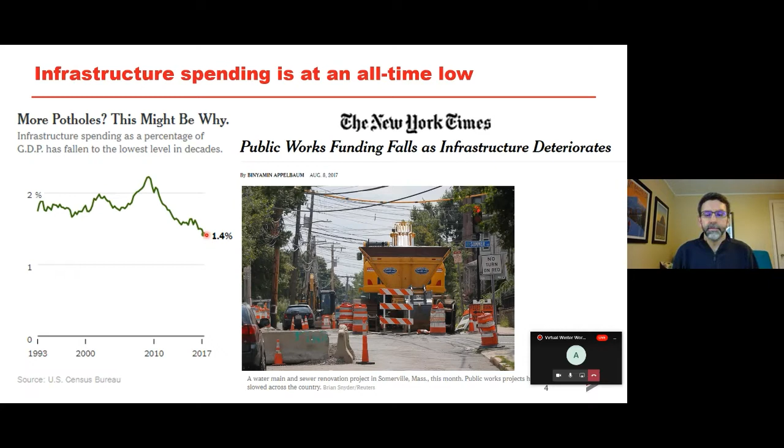In fact, when the American Society of Civil Engineers had to come up with one single grand challenge, they said we need to reduce life cycle costs by 50% by 2025. A couple of years ago that seemed like a long ways away, but now that we're in 2021, it seems like it's just around the corner.

Life cycle cost analysis is going to be a key element of addressing that funding gap, because we could either get more funding to close the gap, or we could be more efficient and decrease the amount of funding that we need.

A big part of our research is in asset management. When ASCE talks about solutions to raise the grade, they mention fixing the trust fund and increasing investment, but one point says we need to use asset management best practices to prioritize projects and improve the conditions, security, and safety of assets while minimizing costs over its entire lifespan—basically, using asset management practices to be more efficient.

So what I'm going to talk to you about today are some tools we can use for economically efficient management of pavement networks: the first is competitive paving prices, the second is life cycle cost analysis, and the third is asset management.

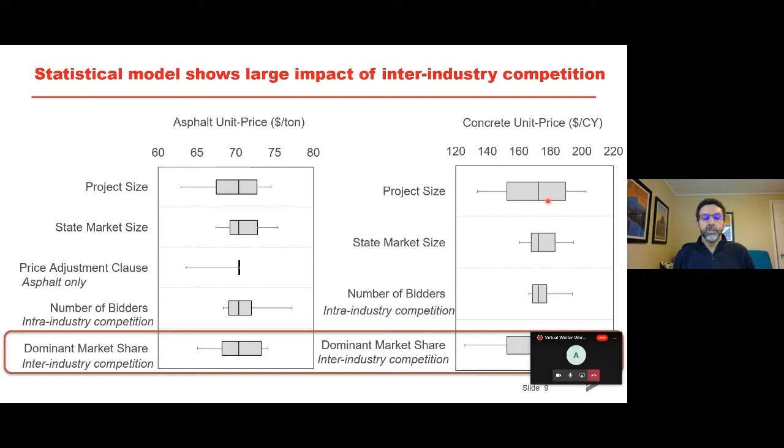Using that statistical model, we can then try to estimate if a state was spending, we just chose an average of 5% on concrete, and then if we increase this level of concrete market share to 10%, 15%, 20, or 25%, how much would that decrease paving material prices?

So if we increase market share from 5% on concrete to 10%, it would decrease asphalt prices by 3% or concrete by 13%. This isn't a specific prediction, it's just saying that statistically across all the data we looked at, when we see higher competition, these are the amounts of lower spending we see on asphalt and concrete.

Then what we can do is estimate if you were to implement that increased competition, how much more paving could you do for a fixed budget? Because if you lower prices for both asphalt and concrete, that means for that amount of money, you can actually do more paving.

So if you're at that 5%, then increase it to 10, 15, 20, 25%, for that 25% you can actually pave more, about a 6.5% increase in total paving tonnage.

I don't think it's rocket science that if you get more competition, you're able to lower prices. What was interesting for us is that the data we were able to evaluate really bore that out, that in this paving market, that is something that we see.

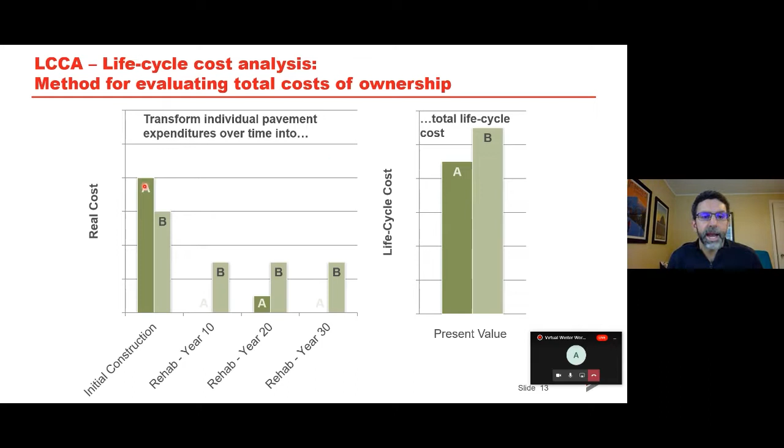But then we also need to look at what are costs associated with rehabilitation that happens in the future. So for example, this alternative A has a higher initial cost, but much lower costs that happen in the future. We can sum those up to get the total life cycle costs. In this case, A had higher initial costs, but lower life cycle costs.

We've developed some models that allow you to look at uncertainty in what happens in the future, and that's what I mean by probabilistic—it just means we incorporate uncertainty. As you can imagine, there are many sources of uncertainty. For the transportation agency, there's uncertainty in the unit price of inputs and also the quantity of inputs. And on the agency side, there's also uncertainty on how much you're going to be using in the future, when you're going to be doing different actions, and what future construction prices will be.

There's also what we call user costs. There are costs associated with traffic delays and fuel loss. So there's uncertainty associated with those things as well.

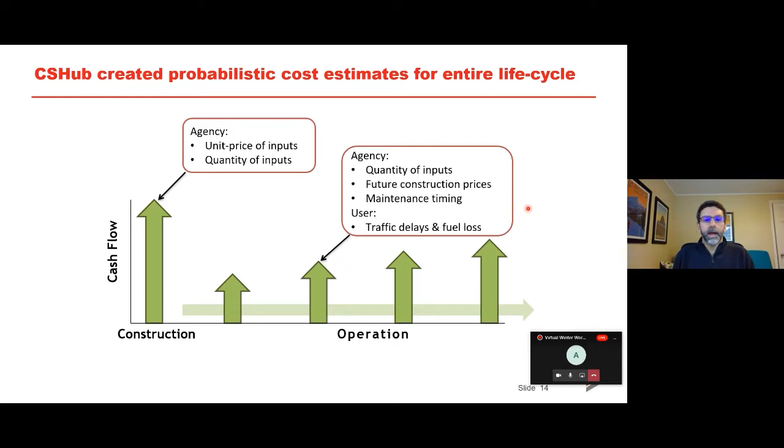One of the things we wanted to look at is how life cycle cost analysis results change depending on context, like where you are in the country. So we looked at a wide range of different scenarios, including a wet no-freeze climate in Florida, a wet freeze climate in Missouri, a dry freeze climate in Colorado, and a dry no-freeze climate in Arizona.

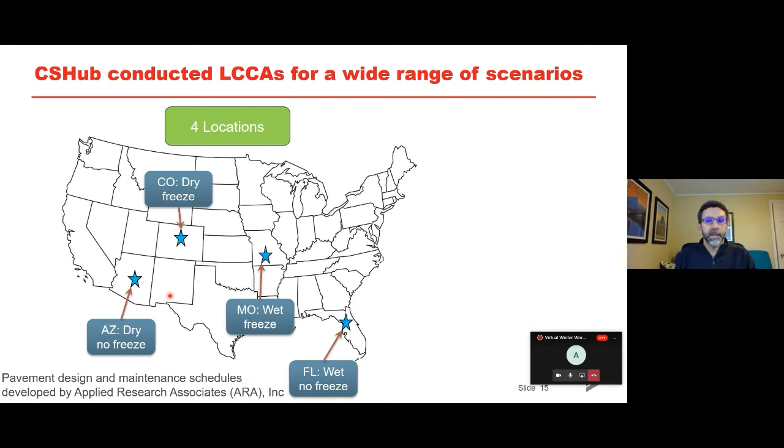We wanted to understand how life cycle cost analysis results change depending on location, and also depending on what kind of traffic levels you have on roads, ranging from urban interstate down to rural local streets and highways.

We also looked at a few different framing conditions: what type of pavement designs are used, whether asphalt or concrete, and which kind of maintenance schedules, design life, and analysis period.

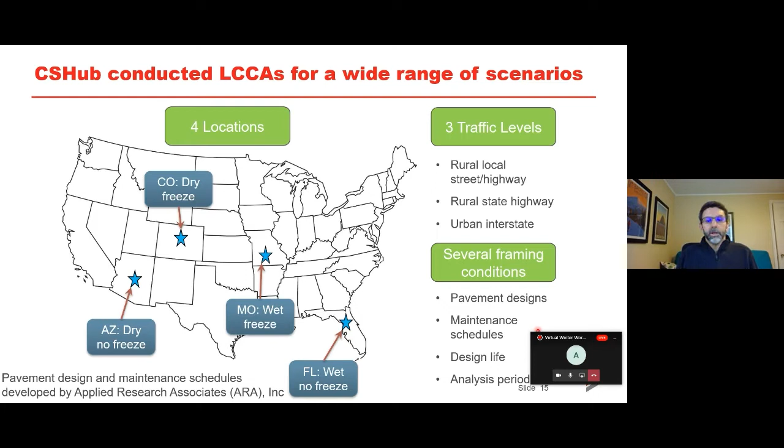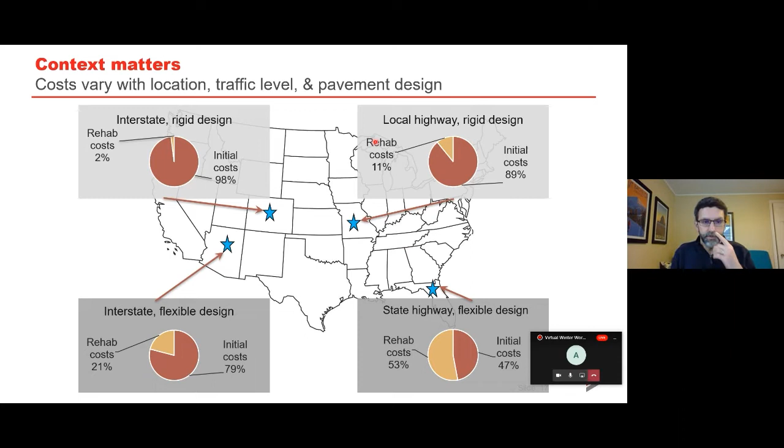So the point here is there's no single right or wrong answer. It just depends on many different factors. And that's why when people ask what's better, concrete or asphalt, we're always going to say it depends, because it depends on many of these factors: the location, traffic level, pavement design, among many other things.

When it comes to doing life cycle cost analyses, I mentioned the importance of pavement designs and maintenance and rehabilitation costs. Another big challenge, though, is determining what are the inputs that you're going to use for the cost side. Just to show you how challenging that can be.

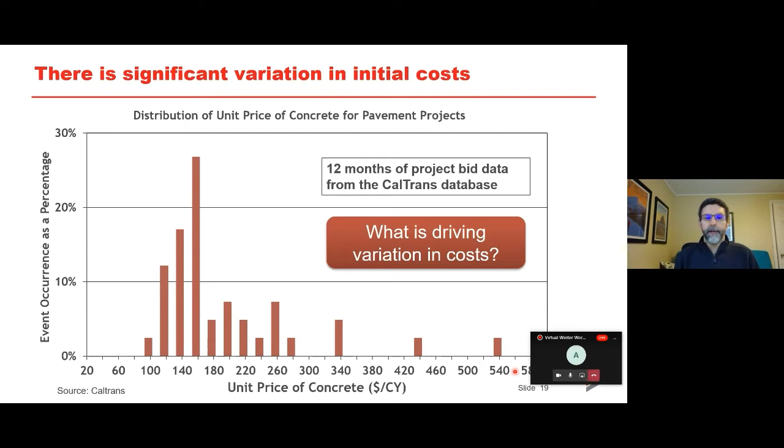Obviously, every job is different. There can be different reasons. Who knows? There was something specific about these particular data points that made them really expensive. But it's important for us to understand what is driving the variation in these costs. That's where, coming back to the statistical models like the ones we use for competition, it's important for us to try to capture those drivers of initial cost and variation.

Just like I showed before, there are other factors. If we knew, we could build statistical models of how costs vary by region, or maybe by season, particularly in a place like North Dakota, where paving conditions are going to vary depending on the season.

So those are all things that we can capture. The other thing is that doing these probabilistic analyses can really provide insight on the relative risks. And what I mean by that, this is not the risk of the project failing, but the risk of exceeding a particular cost. That may be particularly important to some decision makers.

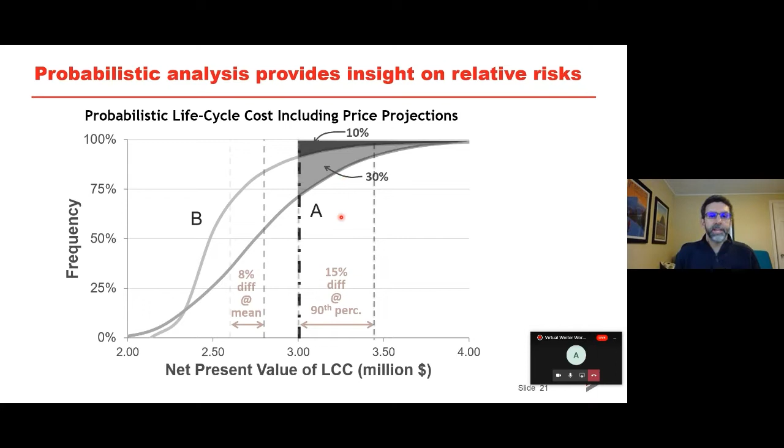Now, out of all the LCCAs that we've done, we have a good understanding of what the major drivers are. It's usually initial costs, meaning that there's all kinds of factors we take into uncertainty, but having a better understanding of what that initial cost is likely to be is what's really going to drive that uncertainty. So it's a key input factor.

And even though we get a lot of guidance from FHWA on how to do an LCCA, they really don't provide a lot of information on how to properly capture that uncertainty, particularly when it comes to inputs.

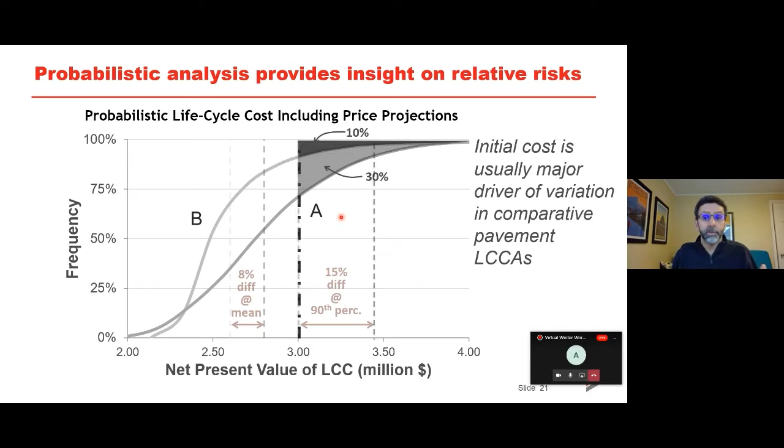Last topic here is asset management, and that may mean many different things to different people. For us right now, the assets represent all the different pavement lane miles in a pavement network. FHWA has relatively recently issued some new performance management rules due to the MAP-21 legislation, which is Moving Ahead for Progress in the 21st Century.

A big motivation was to try and improve decision making through what they call performance-based planning and programming. They had a couple key elements they really wanted to see on asset management plans from the state: how are you dealing with life cycle planning, risk management analysis, and what kind of financial plan are you making. That'll lead me to expand a little bit on this performance-based planning.

The way this performance management process usually works is that states set targets for their pavement network: what's the percentage of good pavements, what's the percentage of poor pavements. Then they measure the performance of all those pavements, driving around with vehicles to measure roughness and cracking. That information goes into the pavement management system.

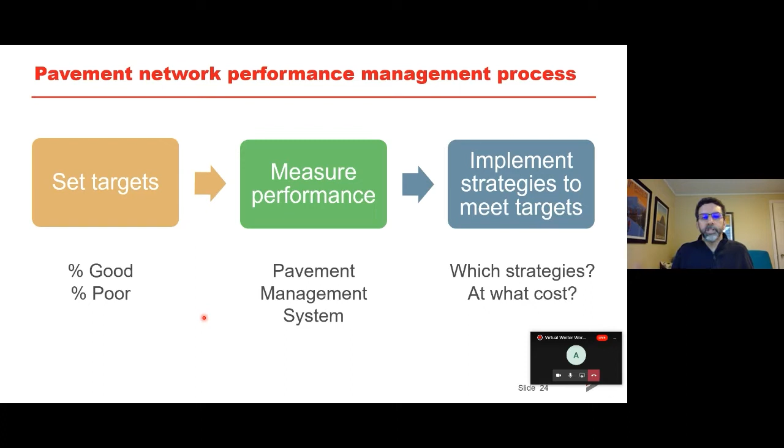Then there has to be a decision about which strategies to implement in order to meet the targets that have been set. But there's a question about which strategies to use and what the cost should be. Basically, we want to understand how we should allocate the funds we have to obtain the best performance at the lowest cost.

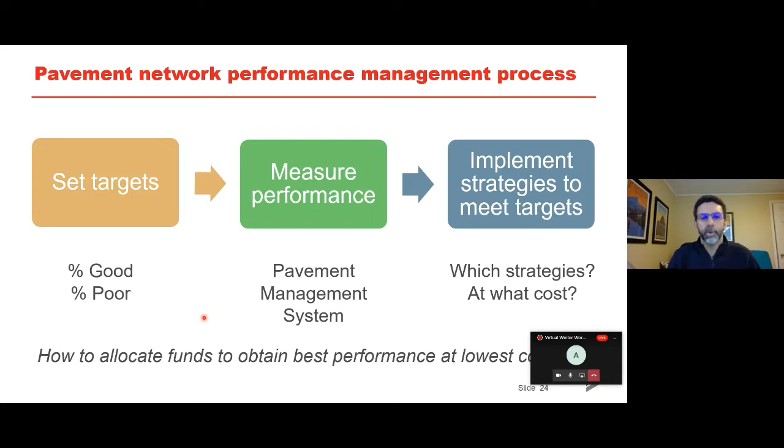This gets back to the theme of trying to do more with less. How do you get the most bang for your buck? There are many different approaches to allocate funds.

Which strategies should be used? Should I use many different short-term fixes so I can spread my funds across all of these, or should I do a few long-term fixes on the worst ones? This strategy component can be difficult.

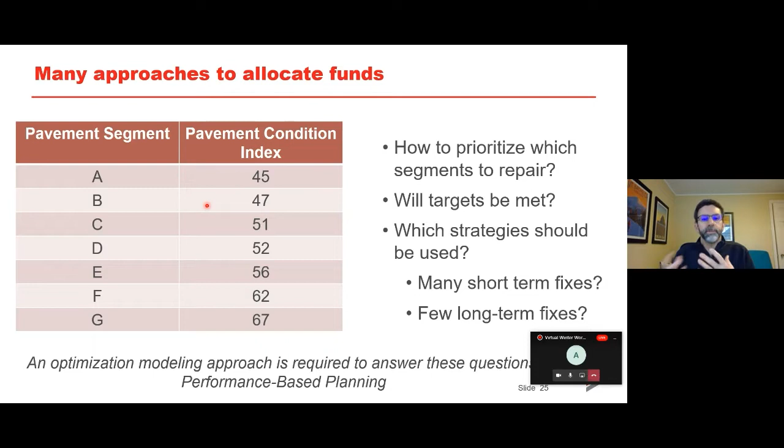Usually what you use is an optimization modeling approach, and that's the performance-based planning I mentioned: developing and deciding which strategies you're going to use in order to meet targets. That's what performance-based planning is.

Our research is trying to improve those allocation decisions as part of this performance-based planning. The way it's usually done is you start with current and historical pavement network data. If I understand the current condition of my network and know how it's been deteriorating in the past, I can use that to develop models to project what would happen in the future.

What would happen if I didn't do anything? What would happen if I did treatment A versus treatment B? I can use that in modeling approaches to make decisions on how to allocate resources. We want to prioritize projects that maximize performance but minimize costs, because we don't have an infinite budget.

This is a challenge for a few different reasons. First, the scale of the problem for a state pavement network is daunting. There are many different decisions to be made, like which activity do you do?

Preservation activity, which is just minor maintenance, overlays which might be more about minor rehabilitation, or major reconstruction or major rehabilitation. So there's all different kinds of options.

I have many different segments, it could be a mile or a couple miles of pavement, and when do I do it? Do I do it now or do I wait? The budget allocation process is how do I allocate a limited set of funds to a certain set of activities that meet my goals.

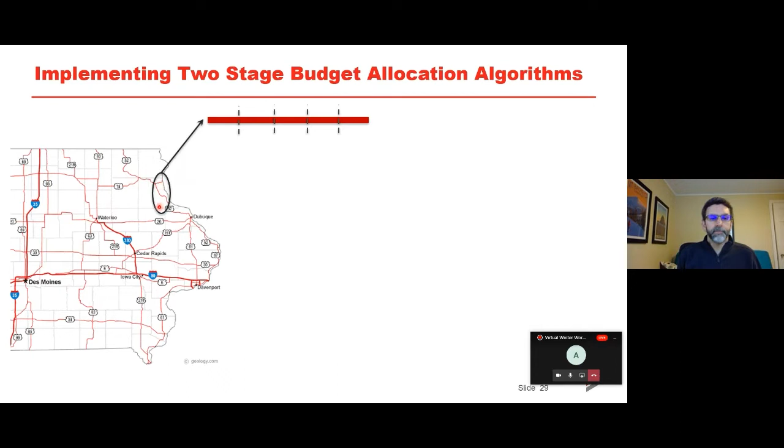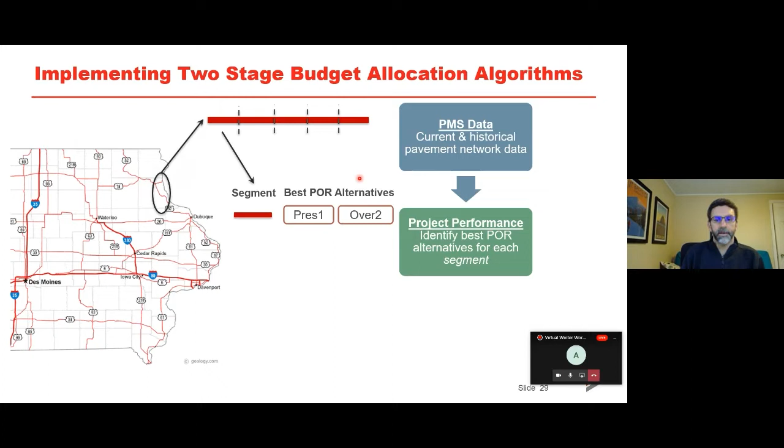The way it works is, let's say you take a pavement network, here showing some roads in Iowa where we've had some data. We get data from the pavement management system, current and historical pavement network data, and use that to develop models to project how pavements are likely to deteriorate in the future. Then for each segment, we determine the best preservation, overlay, or reconstruction alternatives, and we do that for all the segments in the network.

And then we put all those into our allocation algorithm to determine what's the best set of options across the whole network. So let me give you an example of how this is worked out for us using some models.

This is showing the Iowa US route system, just the US routes within the network. This is pavement management system data for them from 2017, about 10,000 lane miles, obviously a whole bunch of different pavement types: asphalt, concrete, and overlays.

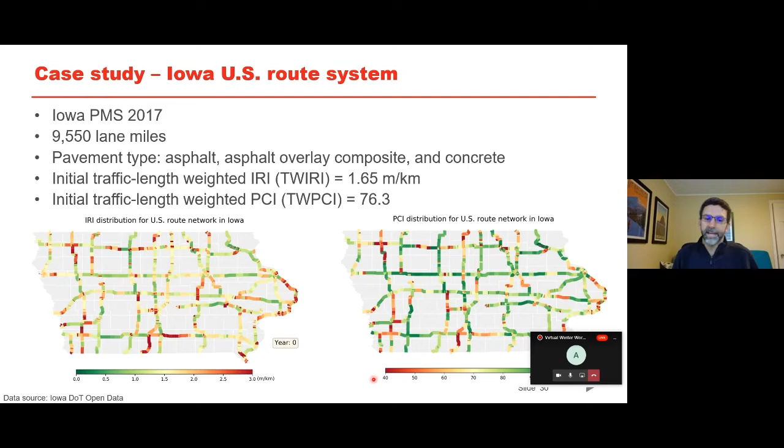What you can see is this is showing the roughness distribution, so from green is low roughness to red is high. And this is showing in Iowa, they use a pavement condition index, where red is bad or low PCI, and green is high.

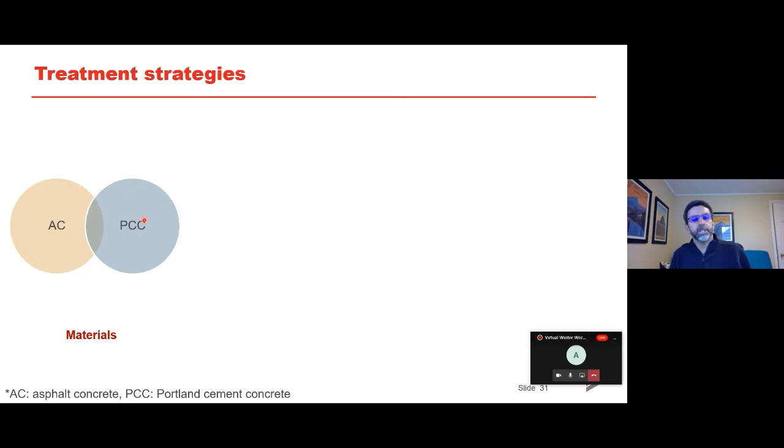Because we have this modeling platform, we can play around with some what-if strategies. We can look at what if we just use asphalt treatment technologies, or concrete, or both. We can also look at different types of treatment types, whether it be preservation, overlay, or reconstruction. Sometimes you'll hear me talk about short-term strategies, which are just preservations and thin overlays, whereas long-term strategies are thick overlays and reconstructions.

The other thing that we do is, within those analyses, we look at different segment analysis periods. So, for example, in determining what's best for each segment, a lot of times people will just look 5 years into the future, which doesn't really comprehend enough of what's going to happen to the pavement and its deterioration. So we also look at a longer evaluation period of 10 years - short term versus long term.

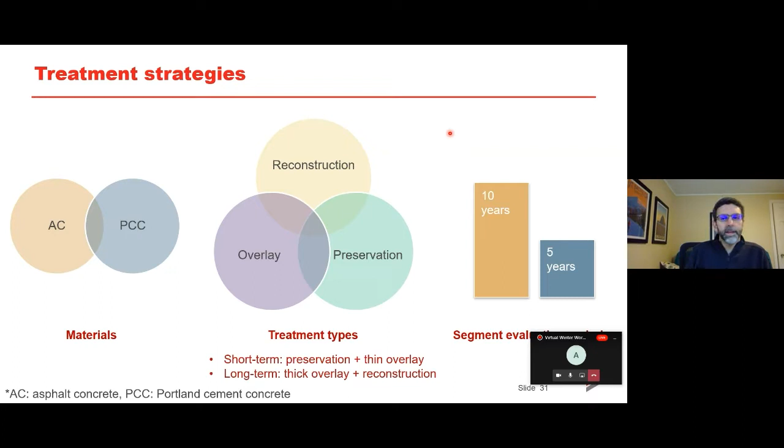Another thing that we account for in our models is quantifying the excess fuel consumption of vehicles caused by pavement design and maintenance. We're basically capturing pavement vehicle interaction.

There's two mechanisms that we're capturing. One is pavement deflection, and this mostly applies to really heavy trucks, which create a very small indentation in the pavement such that the vehicle is driving up like a very shallow hill. So the stiffer the pavement is, the less pavement deflection matters.

The other one is pavement roughness, and this has to do with the shock absorber system of the vehicle. The bumpier it is, the more energy dissipation there is in the shocks of the vehicle, and the more energy that then has to be overcome for that. And so there's fuel that's consumed with that.

So smoother pavements lower this excess fuel consumption. I use the word excess fuel consumption because what we're quantifying here is the additional or excess amount of fuel that must be consumed to overcome this. So if a vehicle were driving on a perfectly smooth and perfectly rigid pavement, there would be zero excess fuel consumption, even though it's going forward.

So what we do in our models is we quantify that amount of deflection and roughness, and then calculate that excess fuel consumption. From that, we can calculate additional costs due to excess fuel consumption, and also environmental impacts, either greenhouse gases or smog pollutants as well.

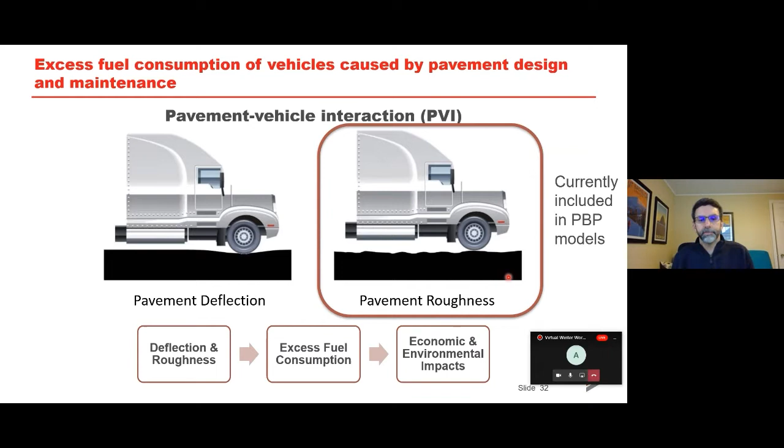Okay, now that we have that modeling part out of the way, let me tell you about the key conclusions that we found, and then I'll show you some results to demonstrate that. It's important in this performance-based planning and asset management to leverage 4 strategies. One is having sufficient budget.

Maybe this isn't a big surprise, but the more money that you have, the better performance that you can get in your network. But second, it's important to have a mix of pavement types, and I'll demonstrate a little bit why you don't just want to be using concrete or asphalt, but a mixture of both.

Similarly, we want to have a mix of short and long-term fixes. You'll see that even though we can address more pavements if we just use short-term fixes, in the end, the deterioration would still be such that we'd have poor network performance.

And lastly, we want to have long evaluation periods. A longer-term perspective means that we can better capture the benefits of those. So let me get into these one by one. First, sufficient budget - increasing the budget level improves network performance and reduces greenhouse gas emissions.

So what this is showing right here is the annual mean traffic weighted pavement condition index. This is basically the measure of network performance, and we want a higher number to represent our overall network health. This is the projection into the future.

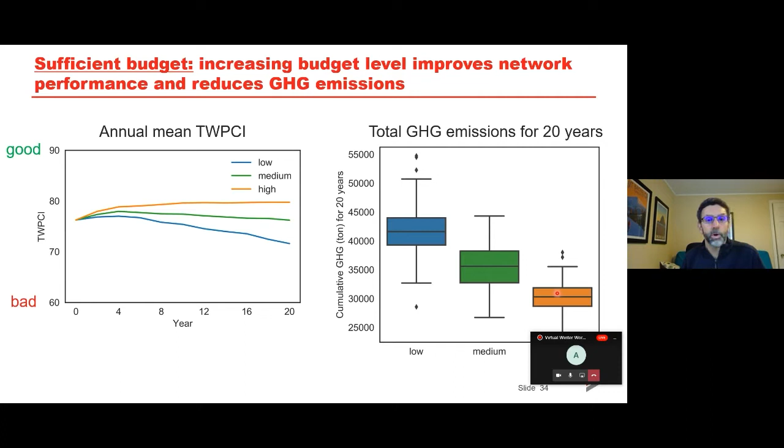Similarly, when it comes to greenhouse gas emissions over that 20-year time horizon, you can see that the more money you spend leads to lower overall emissions. That's because you can maintain a smoother pavement network, which leads to lower excess fuel consumption from vehicles.

Next, if we look at that mixture of pavement types, we looked at an asphalt-only strategy and a concrete, or Portland cement concrete, only strategy. Under the asphalt-only strategy, the model can only use asphalt technologies to improve the pavement. They're relatively less expensive on initial costs, and you can maintain more pavement area, but the treatment effects don't last as long. By contrast, concrete pavements have a higher initial construction cost, but the treatment effects are longer. Because they're more expensive, you can maintain less pavement area.

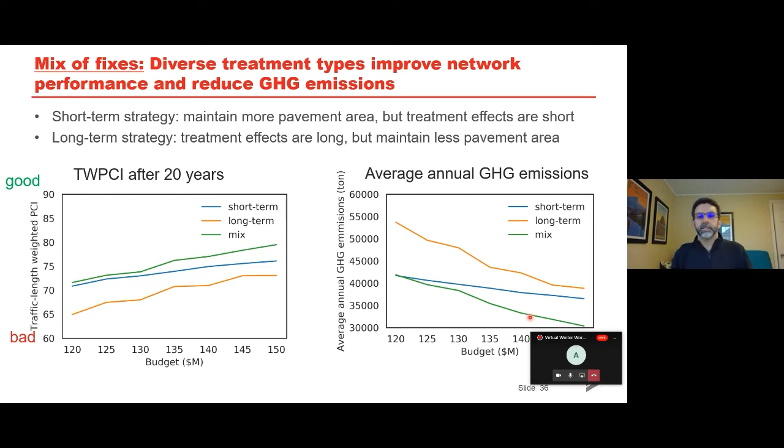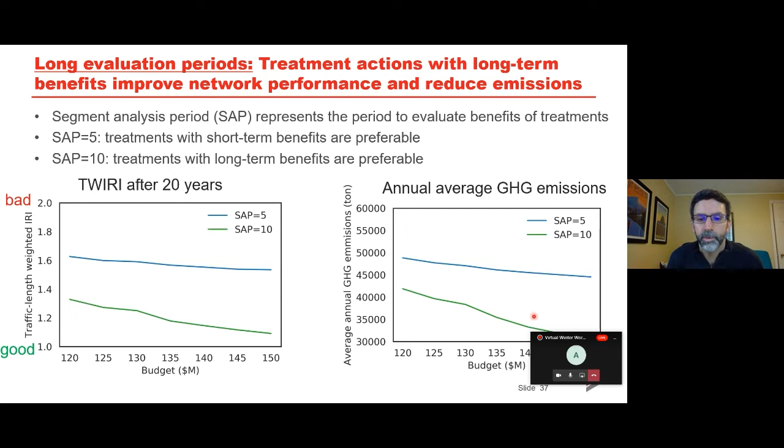So once again, to summarize, when it comes to this asset management, we've shown quantitative results that say it's really important to make sure you have sufficient budget, a mix of pavement types, a mix of short and long-term fixes, and longer evaluation periods. Part of the way I think about this mix of fixes is it's just like wanting diversification in your stock portfolio - you want diversification in your assets. And I mentioned how we account for uncertainty in many of these things.

It just means that when prices in one material are relatively high, it's easy to then pivot and transition to another material. And so that diversification based on the uncertainty over time really helps. But the benefits of all these things then increase with higher budgets.

So looking to the future of asset management, data analysis is really a big thing. DOTs have always been tracking data, and FHWA is asking them to be more rigorous about reporting it. Thanks to that, we have quite a bit of data that we can analyze, but we found that this data analysis can be really challenging.

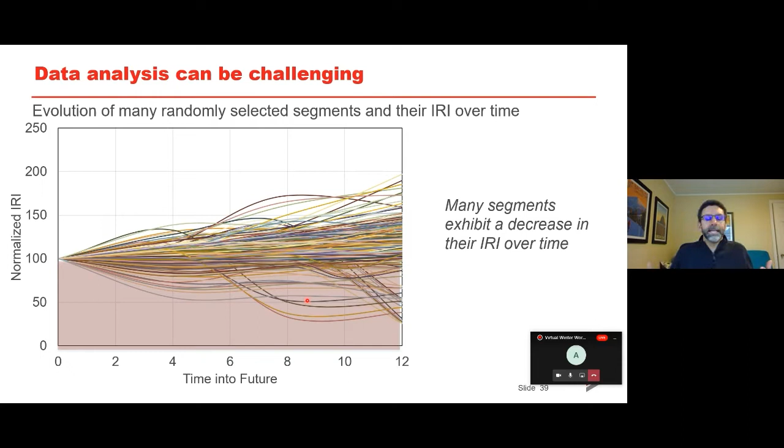What you can see is that for a whole bunch of the pavement segments, the data we're getting from the DOT shows many of them are sort of magically getting better performance-wise, and by the way, this is without any treatments that have been done. So this says either they are able to magically get better, or there's some uncertainty or measurement error. One of the things that's hard to figure out is what's the signal versus noise when it comes to measuring roughness. We honestly don't know that, and I think it's something that we need to address a bit more when it comes to asset management.

So one of the things we've done in the hub is take a lot of that research we did on pavement vehicle interaction and put it into an app that you can use on your phone called Carbin, C-A-R-B-I-N. You can get this in both the Android and Apple App Store.

The way it works is that you mount your phone in your car just as you normally would, on a holder or just on the dashboard or center console. What it does then, as you drive, is measure the vibrations in the vehicle using the accelerometers. Then that data, when you get back from where you're driving, or if you're in a remote place like North Dakota, it'll transmit when you get back to Wi-Fi, to servers. Some calculations are done, and then we can measure what that roughness was and also what the excess fuel consumption was. This is a way to crowdsource roughness measurements from people's phones.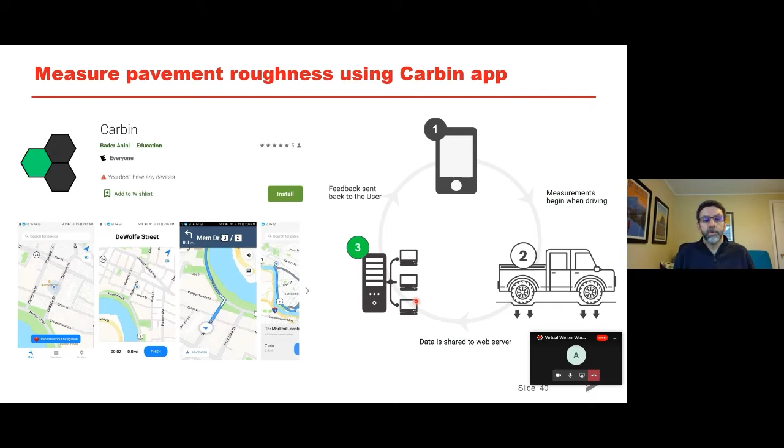Because of that, we've been able to track a whole bunch of data. As you can see, across over 150,000 miles in 28 countries and over 10 million data points. We have it all here on this website where you can play around with it and see what kind of data you have, see what the measurements have shown so far.

I think one of the fascinating parts about this, and the way it can possibly transform asset management, is that now it's obviously expensive for DOTs to measure roughness, and oftentimes they're lucky if they can measure it once a year. Now we can measure it all the time, whether people are doing it or we've put this technology in concrete mixers so that companies are doing it. It can be put in just about any vehicle that's driven, whether using a phone or if the vehicle has a telematics system. So there's lots of opportunities to do that.

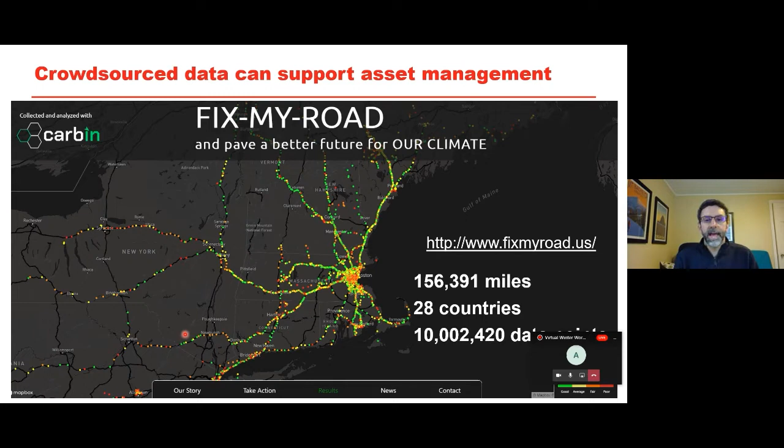Hopefully, as you saw, we can use that data to make better projections about the performance of pavements into the future and get a better understanding of how the network could perform over time. So with that, I will close. We have a whole bunch more information available on our website, and you're more than welcome to follow up, contact us via email. And Art, if there's time, I'd be glad to answer any questions folks may have.

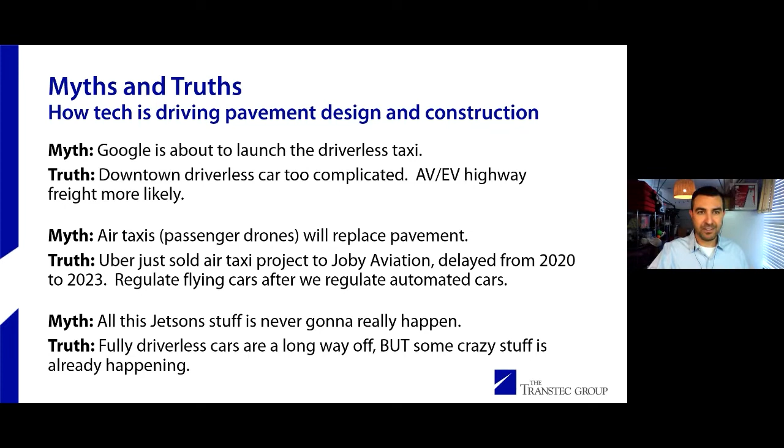My point is this kind of new technology coming to our industry is important to you and me, because if you look back over history, we've seen how technology has really redefined so many industries. Remember newspapers? Remember when radio DJs used to be live? Retail is shrinking and shopping malls are becoming Amazon distribution centers. The list goes on and on, if you look at all the different industries that have just been completely transformed by the advent of technology.

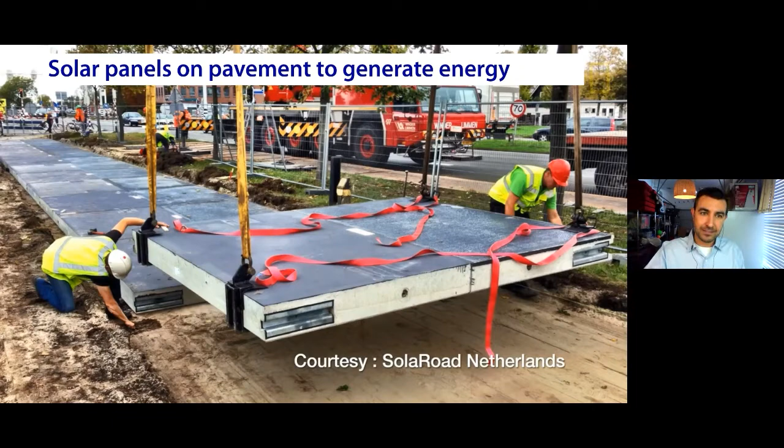The Ray, this nonprofit organization's test section in Georgia, has about 12 different projects running right now, not just solar panels on pavement. The Ray is also testing fancy road striping that can talk to driverless vehicles, looking into things for climate, and they have fancy weigh-in-motion devices that check your tires as you drive across for texture, making sure your tread is thick enough, and measuring tire pressure. So there's a lot of new technologies that the Ray is working on.

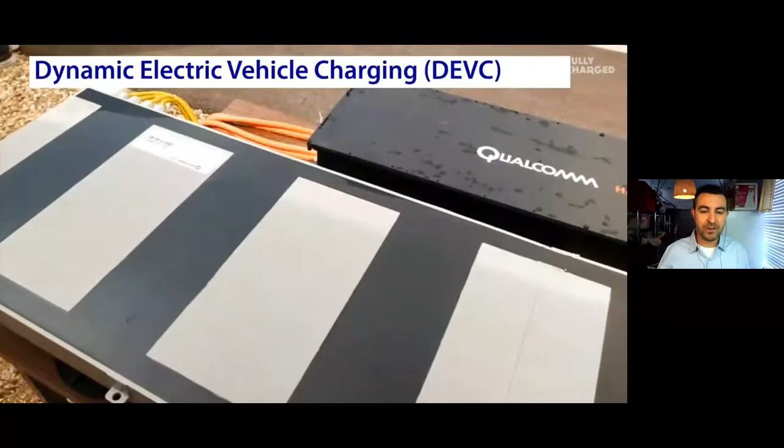Here's another big one, called dynamic electric vehicle charging - recharging your Tesla as it drives down the highway. This equipment is built by Qualcomm. You're looking at a test section in France. It's embedded in the roadway, and as you drive over it, through induction it recharges the batteries in your car. There are test sections in Israel and Sweden, and the Illinois Tollway Authority looked into doing this as a whole new way of collecting toll revenue, but couldn't get the return on investment to work out. People who like this idea say just imagine if you could drive your Tesla over DEVC, then it goes forever - imagine driverless electric cars that never need to be recharged.

But skeptics say this isn't such a smart idea because you're installing this in the pavement, so it's expensive to install and maintain. How are you going to maintain the pavement around it? And the range on Teslas and other electric vehicles is getting better and better, so it may not be all that necessary. The most realistic application might be a downtown circulator bus - a small shuttle that recharges as it circulates, which could possibly have a positive ROI.

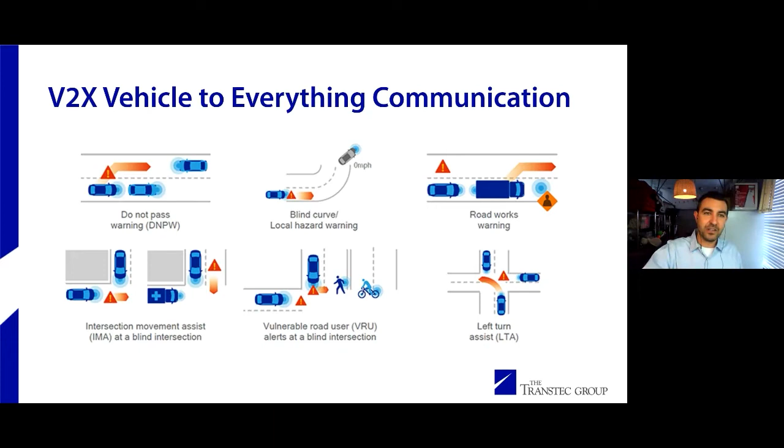V2X can improve traffic flow and safety, and change the way we do lane markings and joint patterns. Roadside units are little boxes you stick into the side of the road that are a major component of V2X, referred to as DSRC, dedicated short range communication. It helps the cars talk to each other and talk to the cloud.

New cars are already doing this, sending data to cell towers, which goes to the manufacturers right now. But that data could soon, instead of going to manufacturers, start going to other databases. That data is called basic safety messaging, generally about 138 kinds of information that go from the car to the cloud 10 times a second. Right now, if you've got a 2018 or newer vehicle, the car manufacturer is capturing all this information from your car passively without your knowing it.

It's everything from: is your turn signal on? Are you depressing your brake? What is the accelerometer in your car saying—are you going uphill or downhill or sliding? It's a lot of information. We're also able to send information back to the car through what's called traffic information management data. Companies are starting to use this BSM data with connected vehicles, and we're starting to develop crowdsourced pavement conditions, which can affect the way we measure smoothness, potholes, or friction.

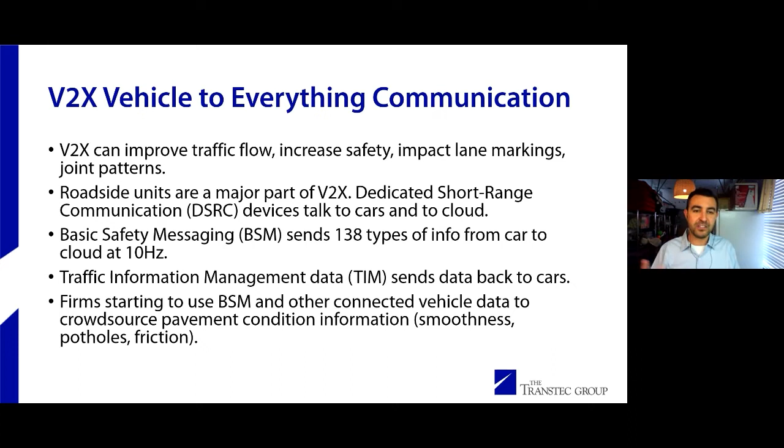V2X is a huge field. You could also imagine using it for driverless truck platooning. Adaptive cruise control is available on new cars, and cooperative adaptive cruise control is where the cars talk to each other. That's coming, and V2X is going to enable it. Imagine if cars were talking to each other and to the cloud—you wouldn't need toll gantries anymore on toll roads.

That's what people call a digital wallet. And that could ultimately change the way we pay for roads. If you think this is crazy, there are well over 40 million cars on the road today in the US that are already sending data to the cloud, and they estimate that within 10 years, the majority of cars on the road will have this capability.

This company, Vaisala, cut a deal with the postal service of Finland, basically the USPS of Finland, and they've strapped cameras and sensors onto every delivery truck. So instead of having these million-dollar vans, they've got a $50 pack of sensors and cameras on every truck collecting all this data in real time. Vaisala claims that all this constantly feeds into what they claim to be an artificial intelligent system doing real live pavement management, which is pretty amazing.

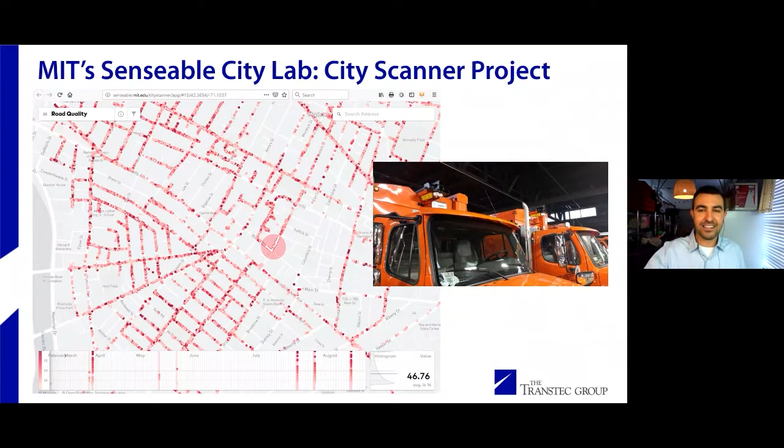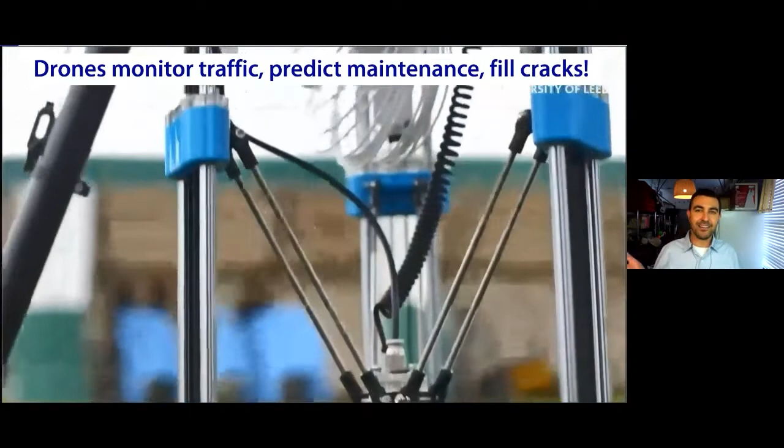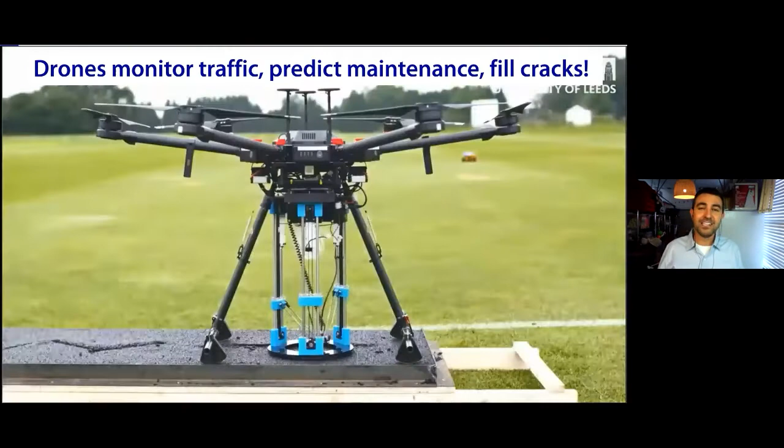That used to be a thing that was prohibitive, but now it can happen. So here's a drone that flies over traffic, looks for cracks, and seals them. If that's bananas to you, it is bananas, because I don't think the researchers really considered 18-wheelers in traffic. 18-wheeler versus drone, the drone's not going to win. But this is a real thing.

People are actually using drones for all sorts of things. There are other companies actively using drones for pavement management, flying over roadways. They have really high-resolution LiDAR and high-resolution cameras, and they're able to identify small cracks and use that to develop maintenance plans, and also use it for pavement management systems.

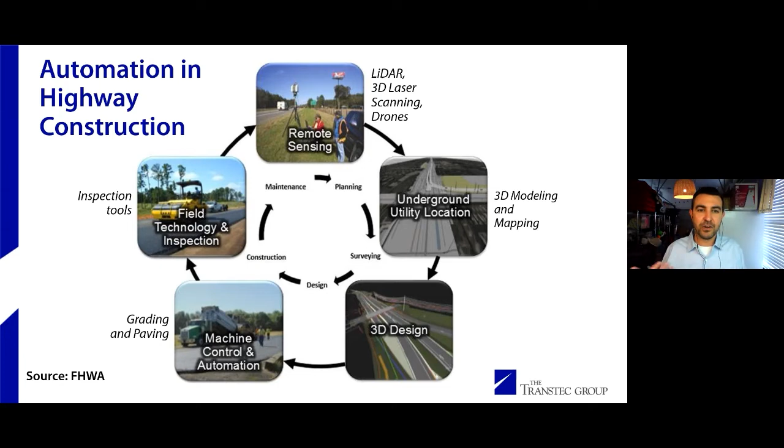In planning, there's 3D laser and LiDAR, and we're using drones now for remote sensing. In surveying, there are so many new developments in 3D modeling and mapping happening. Three-dimensional design is also happening, and I'll show you some examples here in a minute. Machine control is becoming more and more prevalent, and automation is getting more advanced. In inspection, there's intelligent construction, intelligent compaction, and lots of new technologies coming to pavements for automation.

We talked to some of the biggest companies in highway construction and asked them what some of the newest advances are that they see happening for automated construction, and these are some of the examples they gave. But I want to show you the newest one that I saw. So sit back, relax. This is a company called Built Robotics. They are, not surprisingly, out of California, and they are fully autonomizing construction equipment. Take a look at this.

All right, cool, but terrifying.

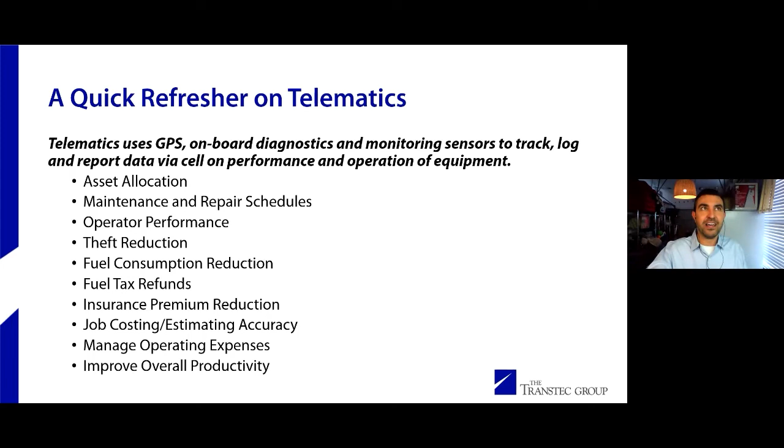A quick refresher: telematics is not new, that's been around for a while. It uses GPS and sensors to improve the performance and operation of equipment, for benefits like asset tracking and reducing theft. So that's not new, but they believe there's still a lot of room for advancement by enhancing the software that runs the telematics they have.

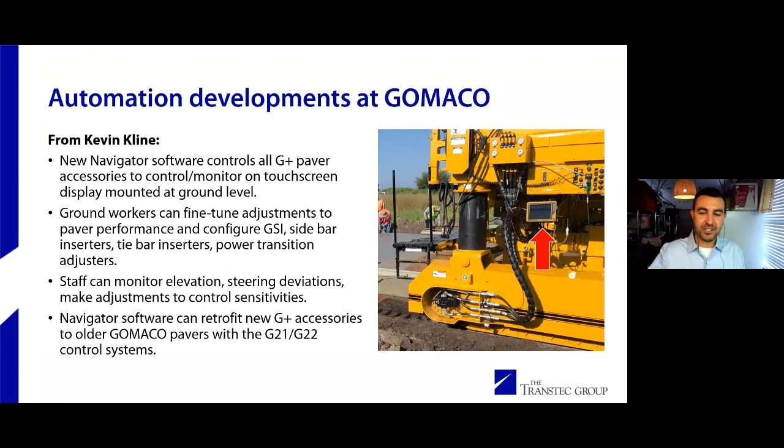We also talked to Wirtgen, and Tim Nash explained how Autopilot 2.0 is the newest thing they have for stringless paving and for optimizing profiles, because it's one tablet you can take from the pole straight to the paver, and it'll make 3D models instantly, or you can import 3D models you already have, and it works with all the existing equipment.

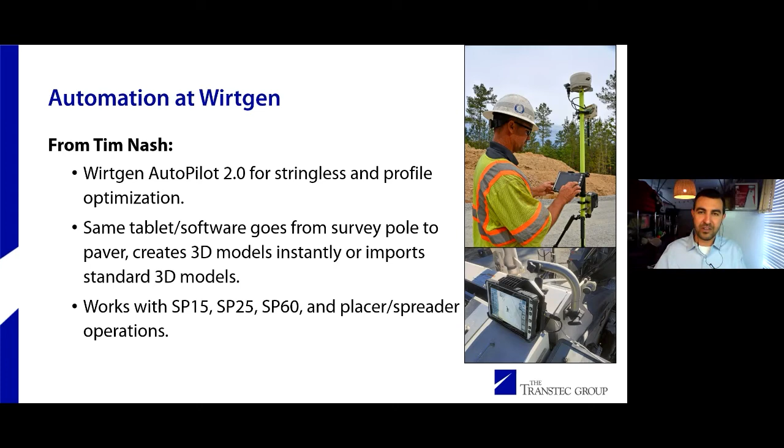The other thing Wirtgen has is a new rear lift for the start-stop of the paver to reduce the bump that happens. The operator can now program it so that as the paver comes to a stop, the rear mold can adjust slightly to try to reduce the bump that often occurs.

We also talked to Trimble, and I'll show you two videos they sent me. SiteVision is full-on augmented reality. Remember the difference between virtual reality and augmented reality: virtual reality is everything you see as an animation, while augmented reality overlays graphics on top of the actual video or image in front of you, the real image. I'll show you an example.

SiteVision has come up with some pretty cool new advancements, so they sent me this video using a testimonial from Cold Spring Construction. They're out of New York, and they're an ACPA member.

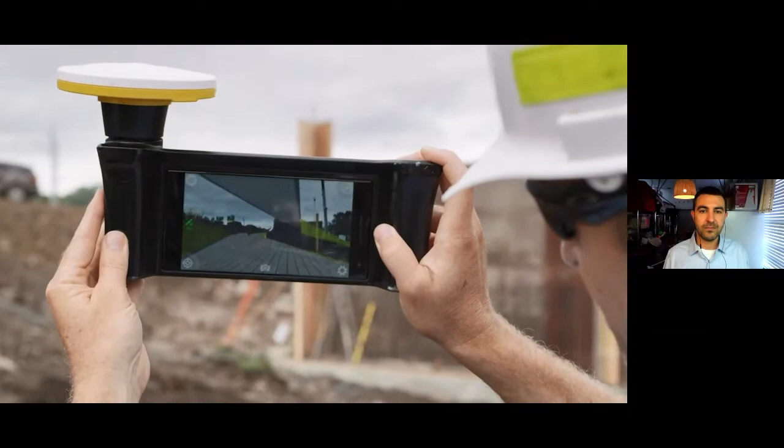This is the first opportunity we've had to use the Trimble Catalyst with the SiteVision software. It enables us to go out and look at the design to be constructed, overlaid on the actual site conditions in real time. The ability to actually visualize what's going to be constructed before it happens is an enormous advantage.

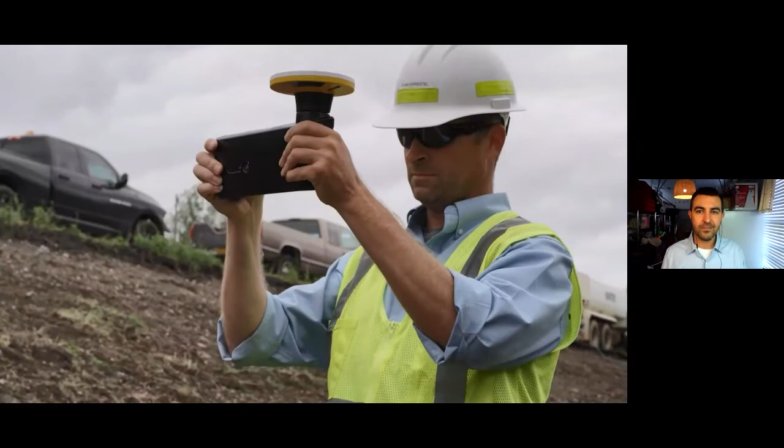Pretty cool. So that's augmented reality, where the graphical image is overlaid, looking right through the camera at what's actually out there. Here's a second video from Trimble, and it's pretty cool.

Pretty interesting stuff. That's pretty wild.

Things that are coming in paving equipment: real-time profilers aren't new, but we're finding more and more state DOTs starting to embrace and accept real-time profiler equipment, and that technology keeps advancing as well.

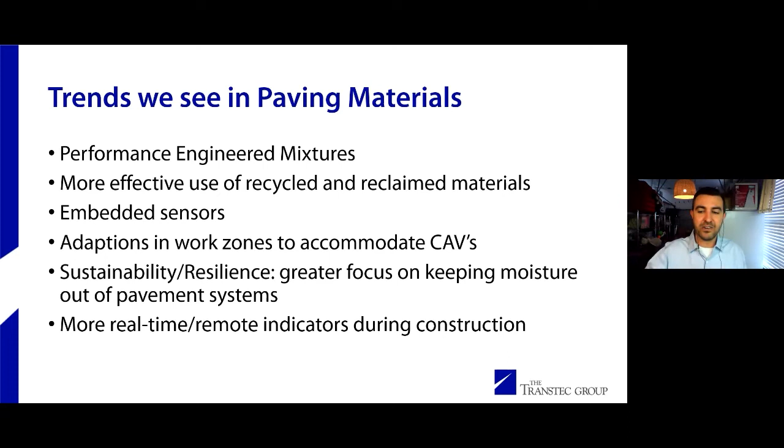So in conclusion, we see a lot of new tech that's going to change the way pavement engineers and contractors work in the field. What we see is that DOTs need to partner enough with contractors and even engineering firms to work through these changes together, to ensure that as they adopt new things, it's in concert with contractor needs and abilities. I think there's room for improvement there.

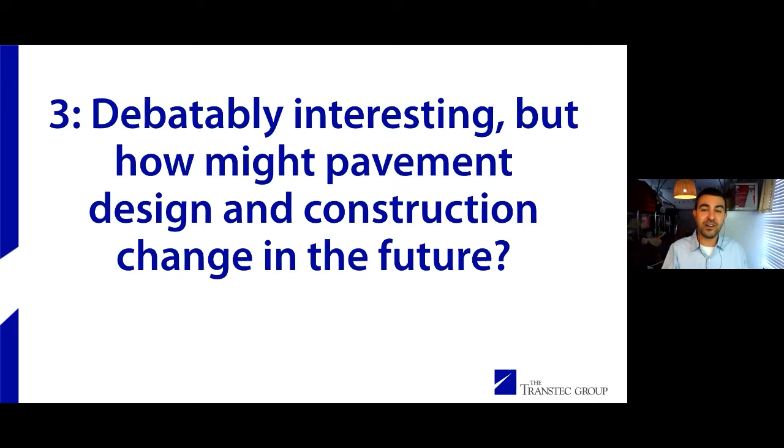All right, last section of our presentation. We talked about crazy new technology coming to roadways, and we looked at new technology coming to equipment and paving. But let's look at the specifics of how pavement design and construction could really change in the future.

This is a press release that just came out last week, so this is brand new. Ferrovial is a gigantic engineering firm that owns Cintra. Cintra, you might know, is that big Spanish company that operates toll roads throughout the US.

They've got toll roads in Virginia, Indiana, and Texas, and they see all this new technology coming. Cintra is a giant multi-billion-dollar legacy corporation that sees all this new technology being driven by the Googles, the Ubers, and the Teslas, and they're trying to get involved. So they've made this big announcement that they're going to start creating the toll roads of the future by partnering with Microsoft, 3M, and Kapsch. Kapsch is a manufacturer of roadside units, like I talked about earlier in the presentation. They're going to work together developing concepts of what the roads of the future could be—open solutions for connected corridors, whatever that means, and safety and mobility to make roads better.

So they're trying to get on board, but they're not the only one. This is the competitor to Cintra. You don't hear about them as often because they don't do quite as much work in the US, but they are active in Canada and Europe. They're called Vinci, out of France—basically like Cintra and Ferrovial, but French. Vinci has a program called Leonard, which I'm guessing is a play on Leonardo da Vinci. Leonard is the same kind of program, developing concepts of the roads of the future to try to get ahead of all this technology and help state DOTs conceive of what these roads could look like with all these new technologies.

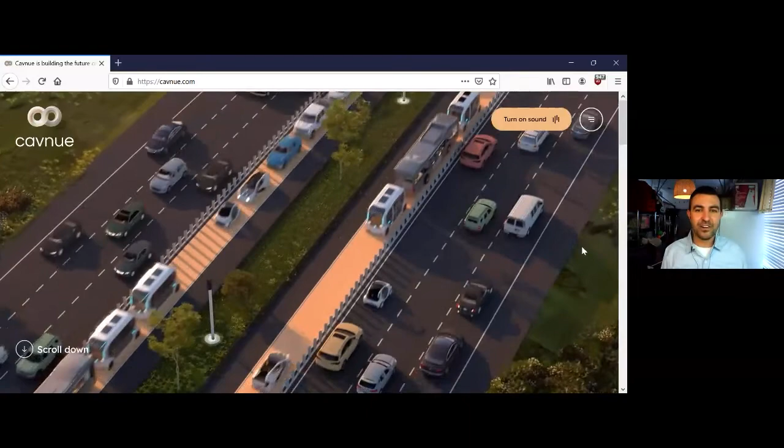Okay, all right. So this is a company called Cavnue, and this is their homepage—the animation is why I'm switching so you can see it. What Cavnue wants to do is similar to what Cintra and Vinci are talking about, developing these roads of the future. But Cavnue is not an engineering company, not a contractor, not a construction company. Cavnue is a company wholly owned by Google. So this is Google in the highway business—Google jumping the fence and getting into your industry very directly. They want to become the new toll road operator, the new concessionaire.

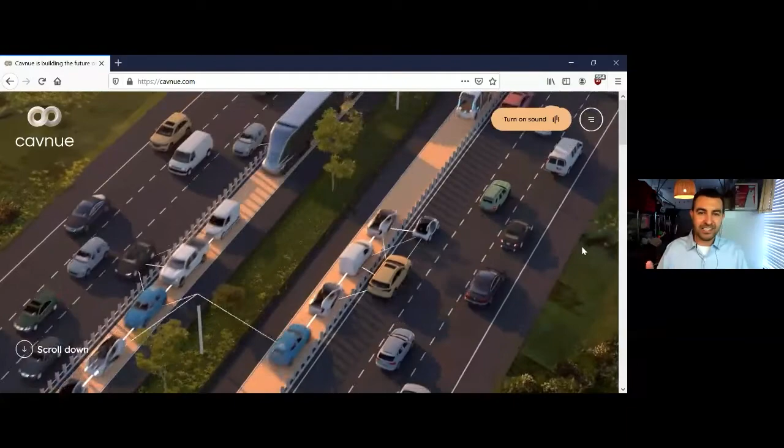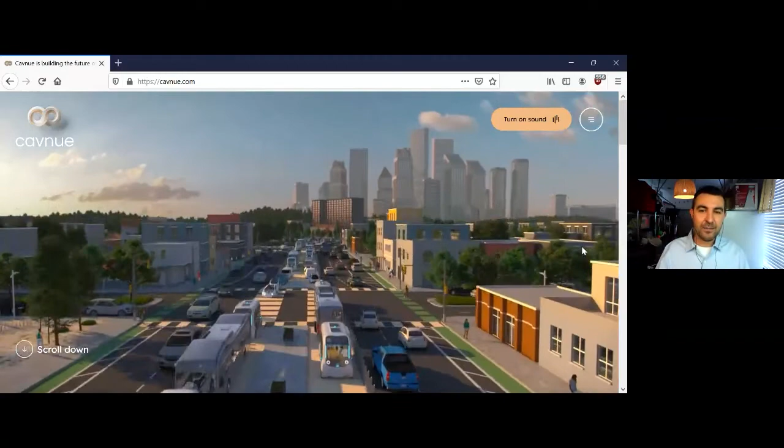So this video—we'll show it one more time and I'll walk you through what they're doing. They're saying: take your traditional highway with too much congestion, and replace the middle lane with a fully autonomous lane in each direction that talks to cell towers. You've got driverless 18-wheelers and driverless cars, and even if your car isn't driverless, you'll merge into the driverless lane, take your hands off the wheel, and it will become driverless—they'll develop that technology. Then in the downtown urban area, we'll have driverless shuttles working on these lanes. Google's plan is to provide all this technology, get in the highway business, and build all this high-tech roadway.

Let me switch back to the presentation. So there we go—that's what Google is trying to do. What's crazy is they think the way they'll generate revenue isn't just from collecting tolls. They want to get in this business because they see billions of dollars in generating revenue off all this data. These lanes could recharge your electric vehicle as you drive across it and charge you for that. Or the lanes could send advertisements to the infotainment screen in your console, generating revenue that way. Or they'll put ads in those driverless shuttle vehicles. So Google is very much interested in getting into the highway business.

And one last important thing—they're already doing it. Google just a month ago signed a contract with the Michigan DOT to study, over the next two years, a stretch of Interstate 94 in Michigan. If they think the concept I just showed you in the video is a viable alternative for Interstate 94, they're going to build it. And they didn't have to—they cut this deal with the Michigan DOT by offering to do their own study for $0. That's how they got this agreement with Michigan: they offered to do it for no money.

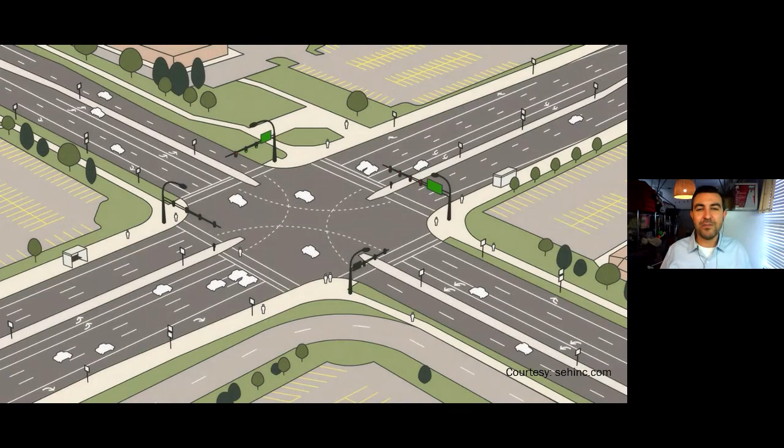We may not need as many lanes. We may not need lane striping. We may not need medians. We may not need traffic lights. We may not need traditional crosswalks. Some people think we may not even need parking lots in the future because of driverless cars, Ubers and Lyfts, and people not owning vehicles anymore.

So this is kind of a quick representation of what the future could look like, and that's a real consideration. So let's start talking about the specifics of how pavement design and construction could change in the future.

As you think about all these things we've covered, DOT planning is going to change because traffic patterns and human needs are changing as cars become more connected and driverless. Also, big design-build projects around the country could become more popular because as technology advances, DOTs don't have 40 years of historical legacy knowledge of how all this works.

They're going to rely more on private sector companies to answer these questions about how you develop that. That's already happening with Google offering to build a toll road on Interstate 40. Also, as more Uber, Lyft, and shared vehicles happen, you're going to have fewer cars owned by people.

So there'll be less need for parking lots. We may actually have to start creating, imagine a right lane that is just for dropping people off and picking people up for all this Uber and Lyft type vehicles that are becoming more popular.

Geometric roadway design is going to change as well because CAVs will be a lot more precise than human drivers, and we may not even need lane striping as much. We'll look at that in just a minute.

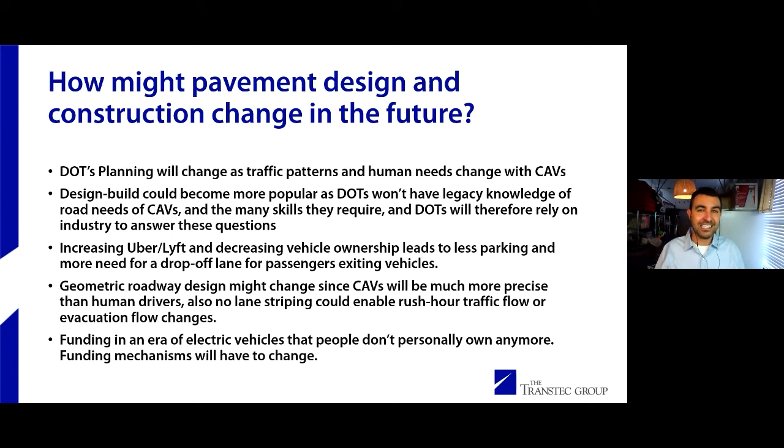And then electric cars are becoming more popular, which means we're buying less gas, which means we're generating less gas tax. So how we fund roads of the future is going to have to change.

So some specifics that could change pavement design: driverless 18-wheelers are being tested right now, and driverless cars on highways is a possibility that's being tested right now.

If you imagine they're driverless, then there's no lane wander anymore, right? That 18-wheeler is computerized, so it's going to be right in the wheel path all the time. Less lane wander could actually be good for concrete versus asphalt because you've got more localized impact loading happening as you're driving over the same wheel path every time.

Narrow lanes also lead to greater impact and greater fatigue on that narrowed pavement, which could also be a good argument for concrete over asphalt.

As you do these driverless truck platoonings, that will lead to reduced following distance between trucks, which means less recovery time from the load, in the time between trucks or in the headway. So reduced following distance could also be good for concrete over asphalt.

Also, as we move towards driverless trucks, the hours of service is going to lengthen, so we'll have more trucks moving more hours per day. There'll be increased nighttime traffic, which is a totally different design for asphalt. So that could be good for concrete pavement.

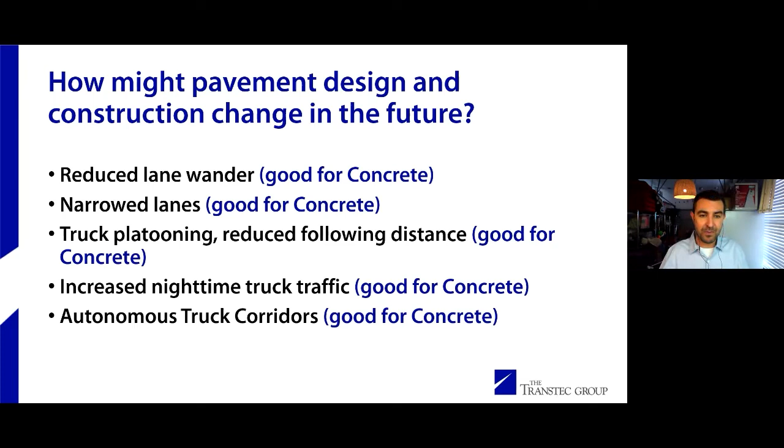And then autonomous truck corridors - this is a concept developed by our friend Tyler Ley, a professor in Oklahoma, of having dedicated lanes for driverless electric trucks, whether powered overhead or electric trucks powered underground. We could develop these autonomous truck corridors, and that is absolutely a great argument for concrete over asphalt.

Other things: embedded sensors, embedded electrification of roads. Some people want to put, like in Colorado, they want to put Wi-Fi in roads, they want to put fiber optics in roads.

All of that is a good argument for concrete over asphalt. Also, the increased demand for resilient pavements. As we've well seen, concrete does a much better job of surviving major weather events over asphalt.

Something that is changing, but is not necessarily a strength for concrete: if we start to remove signalized intersections, then we may not have the rutting and shoving of asphalt at intersections where we have turning movements and stopping and starting. But that's just a change that could be coming to the way we design and build pavements.

And then future work zones, as vehicles are talking to each other, and just the increased need for pavement smoothness, because all of these new technologies can only function on pavements that stay smooth over a long period of time. And so that's a good argument for concrete.

Finally, Vision 2040 is a report written by the American Concrete Pavement Association that touches on a lot of these topics, and it's a great report. It's freely available on the ACPA website. I highly recommend it—it's good reading material.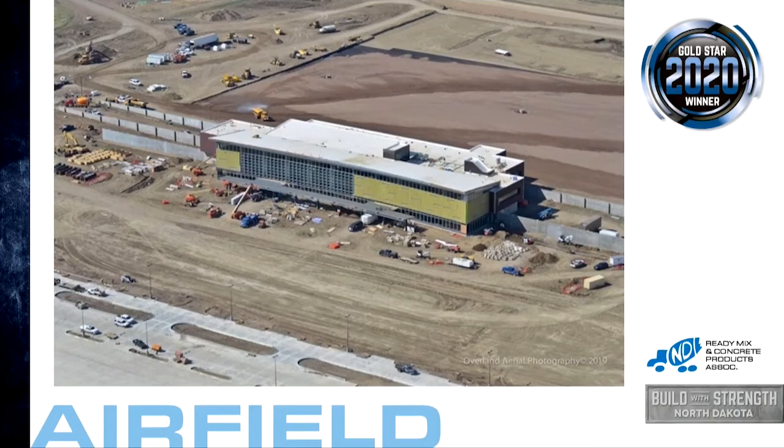Partnering with the State of North Dakota and the Federal Aviation Administration, the City of Williston now has an airport that is flexible, sized appropriately, and efficient to serve the air traffic needs of the city and region well into the future. Accepting the award on behalf of the project is Rob Richter from Strata Corporation.

On behalf of Strata Corporation, I'd like to thank the North Dakota Ready Mix Association for choosing the XWA Terminal project as an outstanding project for 2020. It is great to be part of such an important project for the City of Williston and the Bakken region. Working together with Doyle Hughes Construction and Wind Construction, the terminal construction went very smoothly.

Thank you, Rob, and well deserved. If you haven't had the chance to check out this project, be sure to do so. The facility is well designed and a statement piece for anyone traveling into and out of western North Dakota.

In the bridge water feature category, the winner is the Long X Bridge replacement located in western North Dakota on US Highway 85. The project owner is the North Dakota Department of Transportation, the design firm AECOM. The contractors, Ames Construction and Malcolm Drilling. The concrete supplier, Strata Corporation.

Highway 85 is a main traffic route for the energy, agriculture, and tourism industries in western North Dakota. Due to increasing traffic volumes and rising repair costs of a 60-year-old truss-style bridge along the route, the North Dakota Department of Transportation decided it was time to replace the bridge.

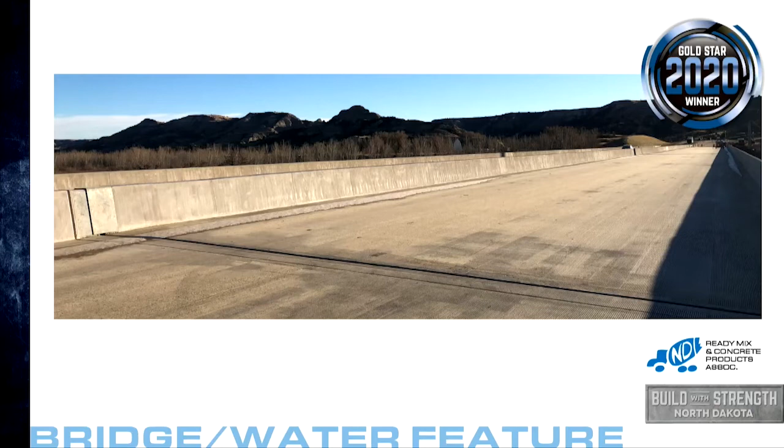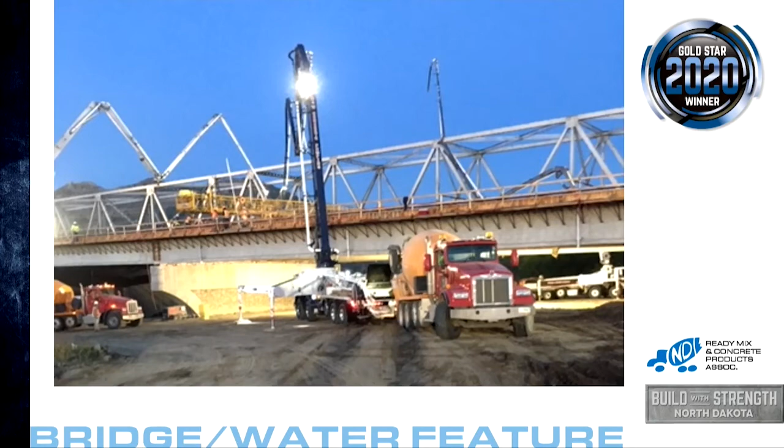The state of North Dakota invested $37.4 million to transform the Long X Bridge into a safe and accessible passageway, said NDDOT Director Bill Panos. U.S. Highway 85 and this bridge are essential to transportation movement in western North Dakota. Construction of the bridge took more than 8,000 cubic yards of concrete and just over 1 year to complete.

Accepting the award on behalf of the project, once again, here is Rob Richter from Strata.

I'd like to thank the North Dakota Ready Mix Association for choosing the Long X Bridge as an outstanding project for 2020. It was an interesting project to be a part of, from the large diameter drilled shafts requiring 250 yards each with a minimum slump of 8 inches maintained for 6 hours, to the decorative piers, to the three large deck pours. The project posed a few challenges, but working together with Ames and AECOM, we were able to complete this vital piece of infrastructure on time.

Approximately 4,200 vehicles travel daily over the bridge, which is located about 15 miles south of Watford City.

It's not too often you see tower cranes working on projects in North Dakota, where we tend to build out, not up. But our next award-winning project needed not 1, but 2 320-foot tower cranes to aid in construction. This project definitely changed the skyline of downtown Fargo.

Our 2020 commercial category project winner is Block 9. The owners of the project are Block 9 Partners. The design and engineering firm was SOM, the contractor McGough, the concrete supplier Aggregate Industries, and other contributors Seco, Sowells, and Braun Intertec. Block 9 consists of an 18-story, 230-foot tall mixed-use building, an 8-story parking garage, and a plaza.

Due to the schedule and logistics of the project, no space was left for laydown. The project utilized just-in-time deliveries and off-site storage to meet these challenges. In total, over 73,000 man-hours were used for the cast-in-place concrete for the building. Thank you.

And that's quite an impressive structure. Congratulations to all involved with the Block 9 project. I hope, as you can see so far, it takes a lot to win a Gold Star Award. The projects must rise above the ordinary, and competition each year is very tough.

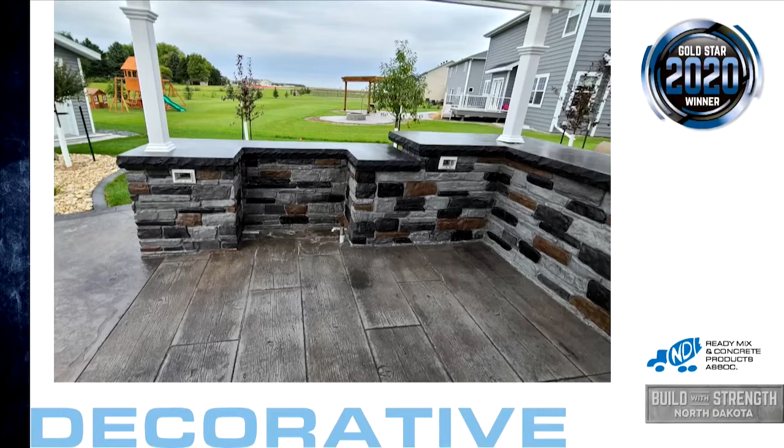That's what makes our next winner so unique. For the 3rd consecutive year, the Decorative Concrete Gold Star Award is being given to Kaufman Construction. The award-winning project is the Voss Residence located in Casselton. The project owners are Tanya and Nick Voss, the contractor Kaufman Construction, the concrete supplier Aggregate Industries. Kaufman Construction had done prior work for the Vosses, so when they had a new home built, they reached out to Brian for help and ideas on their outdoor living area. Kaufman then turned a hand-sketched drawing into their reality.

Here to tell us more about all the work that went into this project and to accept the award, please welcome again Bruce Johnson from Aggregate Industries.

On behalf of Aggregate Industries and Kaufman Construction, I'd like to thank the North Dakota Ready Mix Association for choosing this award. It's a real unique home project that Kaufman had put a lot of time and energy into, and it turned out pretty neat. The final product is a 1,000 square foot sand finish pool deck, a 1,500 square foot stamped concrete patio, fire pit, concrete seat wall, and also an outdoor kitchen.

The customers wanted everything to be made out of concrete and not landscaping blocks. The first part of the project was completed around the pool, incorporating a non-slip yet decorative surface. Kaufman chose to go with a colored and exposed aggregate sand finish with different color bands in the concrete. This provided functionality, durability, and decorative look to the pool area.

The second portion of the project was the fire pit, seat wall, and decorative columns. This look was achieved by using Butterfield ledgestone form liners along with multiple different colors of stains and dyes and color hardeners. The next step was the 1,500 square foot patio area.

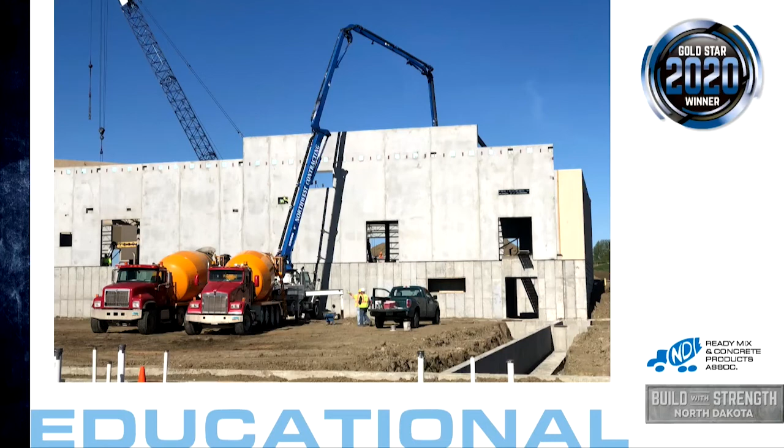The state-of-the-art St. Mary's Central High School was created and wowed the public with its elegance and professionalism. The 150,000 square foot facility features 4 centers: the St. Thomas Aquinas Academic Center, an athletic center, the Myron Atkinson and T. Clem Casey Fine Arts Center, and Our Lady of Victory Chapel.

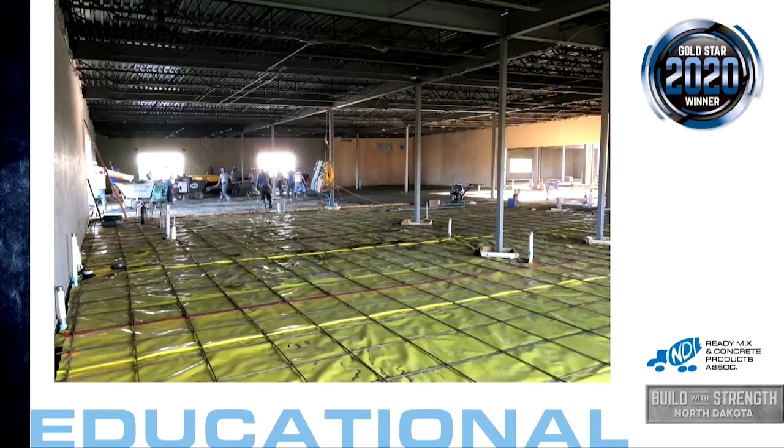The school has an open design that brings a collegiate feel. It was designed for a rising attendance capacity of 525 students, with currently 355 students enrolled. The school features exceptional finishes on everything, including its concrete. More than 6,000 cubic yards of concrete were placed as part of the project. Accepting the award on behalf of the project team, here's Clint Phelan from Strata Corporation.

Well, we want to thank the association for this award. This project created a new landmark. We always appreciate working with Northwest Contracting, and we thank them for allowing us to work with them on this project. Tom, Eric, Greg, and Raylan are always a pleasure to work with, as well as the rest of their crew. Northwest is truly a leader in the construction industry, and they have been very eager to embrace all the new innovations and advancements that have been provided to the industry, which sometimes is a tough sell to others. So we always appreciate that.

Also want to thank Chris Wentz with CW Structural. We're fortunate to have a company like CW right in our community and appreciate their guidance. And in closing, we would like to congratulate the Light of Christ Catholic Schools on an absolutely, truly magnificent new St. Mary's High campus. Thank you.

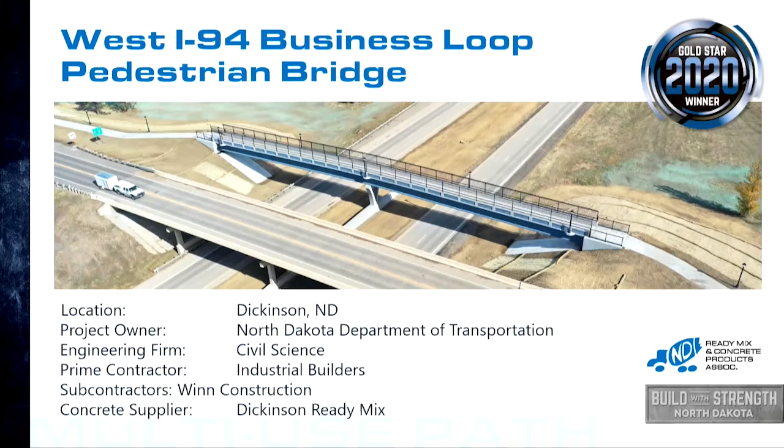Before construction of the West I-94 Business Loop pedestrian bridge, there was not a safe way for pedestrians to cross I-94 unless they chose an alternate route more than a mile away. The construction of the new pedestrian bridge completes the connection between the existing shared-use path to the north and south of I-94, giving residents the opportunity for a brisk walk, jog, or bike ride on over 9 miles of trails around the perimeter of Dickinson.

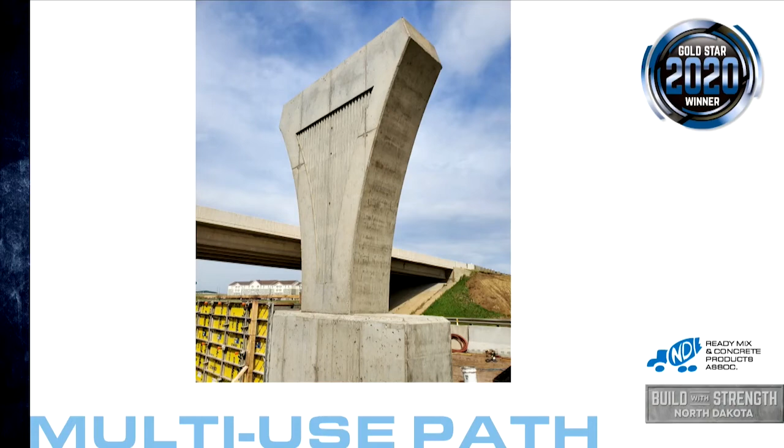The project consisted of constructing a 10-foot wide shared-use path, nearly 2,500 feet in length, and a 2-span pre-stressed concrete I-beam bridge across I-94 with an overall length of more than 260 feet.

Some decorative elements used to enhance the aesthetics of this project were a ribbed, cast-in-place center concrete pier. The bridge's exterior walls include a stamped pattern with a 2-inch recessed area throughout the length of the bridge. The lighting is black, vintage, ornamental light standards that match the bridge railing. Finally, a raised concrete median at Fairway Street utilized a stamped and colored brick pattern.

Accepting the award on behalf of the project is Ben O'Lean from Dickinson Ready Mix.

Thank you. First, I'd like to thank the association and its board of directors for this prestigious award. It's always a joy to make projects like this a big success. I would thank the members of the DOT that we've worked with, Dennis Yugi, Jason Fisher, and Rob Rayhorn. Also like to thank Aaron and Chad from Industrial Builders, all the members of the Winn crew that made this project a big success, and Civil Science for understanding the necessity to make this project a success. Projects like this are always fun to be a part of just because it ties the whole community together. This was an interesting project going right over the 94 business loop and over the interstate there. Thank you.

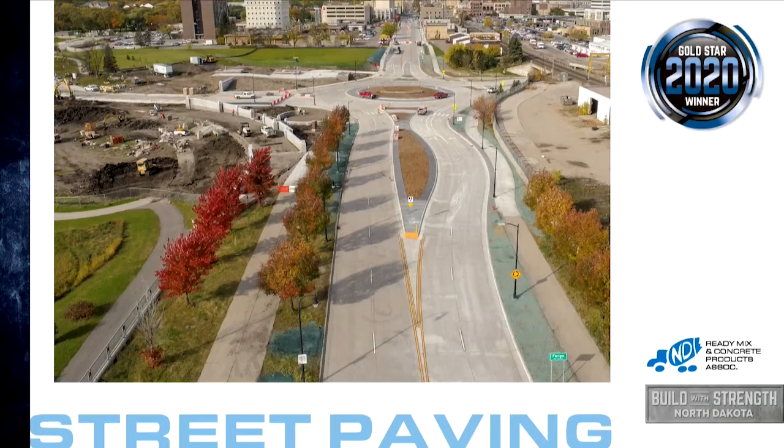Prior to design and construction, economic studies were conducted to determine the best use of the existing footprint of Main Avenue and to balance the varying needs of businesses along the route. The results of the studies were incorporated into the final design. Concrete was chosen as the building material for the mainline pavement, bridge deck, sidewalks, sloped planter beds, and project boulevards.

Concrete was selected because it provides a low-maintenance, long-lasting surface that blends well with existing NDDOT and City of Fargo projects around the area. The project team worked with its concrete suppliers, the project owner, and quality control firms to develop concrete mix designs to meet several challenging placement areas while still abiding by industry, state, and city specifications.

Many decorative elements were introduced into this project to improve safety for pedestrians and the traveling public, as well as the aesthetics of the otherwise urban area. The use of colored and stamped concrete was utilized on some of the boulevard spaces, and concrete paving blocks with alternating patterns and colors were added to some ADA landings.

In addition, concrete planters and curb beds allowed for approximately 150 trees, 200 shrubs, and 2,500 perennial plants to be planted along Main Avenue. Accepting the award on behalf of the entire project team is Vince Frost from Strata Corporation.